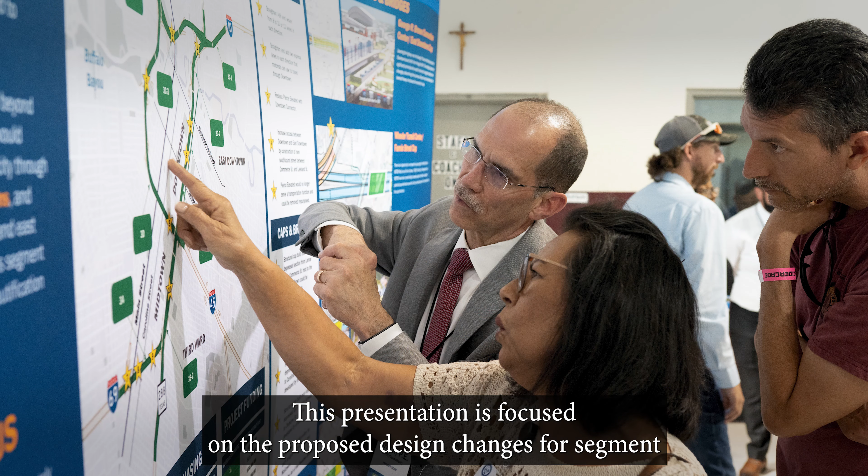This presentation is focused on the proposed design changes for Segment 3A. NHHIP Segment 3A includes modifications from the designs presented in the final environmental impact statement and record of decision. Therefore, the public has an opportunity to provide feedback on the changes presented during this public meeting.

TxDOT is required to assess the potential impacts of the proposed changes in accordance with federal standards. These standards are a provision of the National Environmental Policy Act, known as NEPA. The NEPA process provides analysis of the potential impacts to the natural and man-made environment and informs decision-makers on how to proceed with the proposed project.

On December 9, 2019, TxDOT received a signed Memorandum of Understanding from the Federal Highway Administration that permits TxDOT to assume responsibility for review and approval of certain assigned NEPA projects.

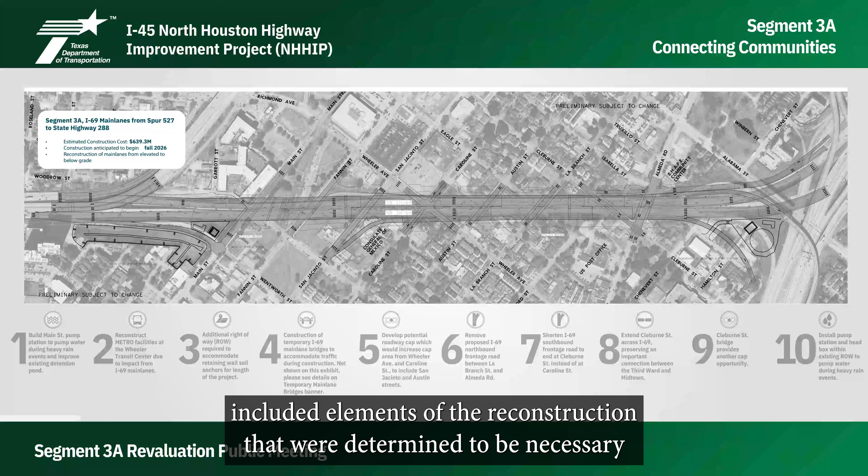The Segment 3A reevaluation is a function of changes to project design developed subsequent to issuance of the final environmental impact statement and record of decision. The changes include elements of the reconstruction determined to be necessary as part of the detailed design process that continues following the ROD, or elements determined to be important to the project as a result of consultation with local government agencies and community organizations.

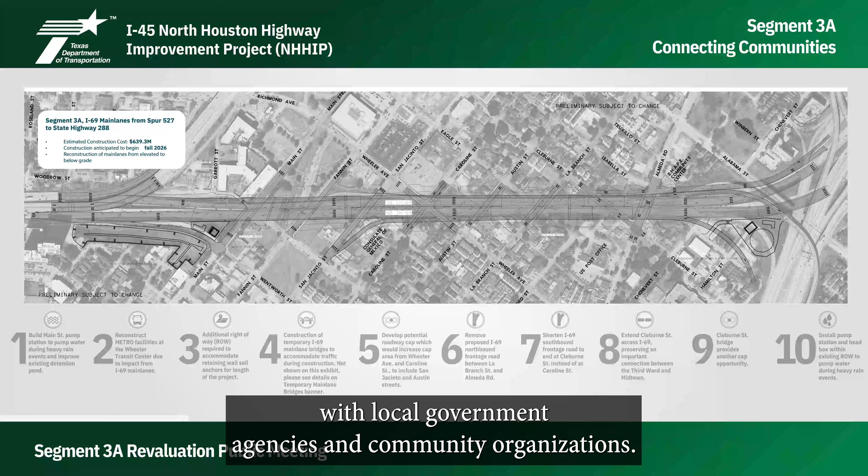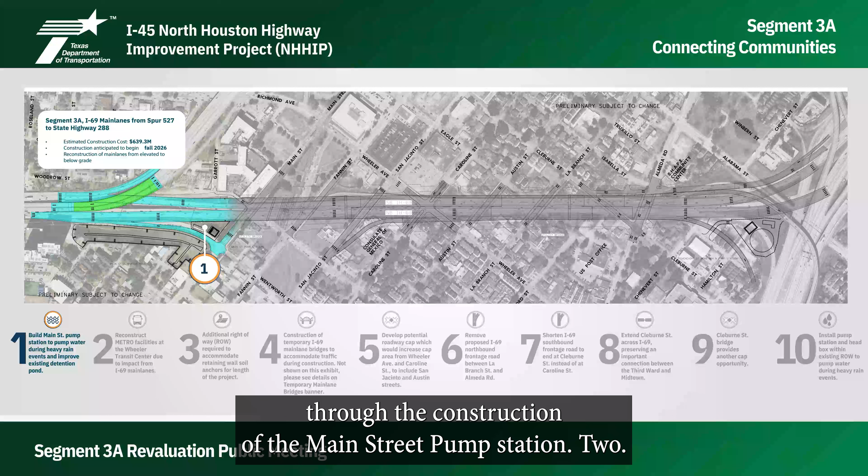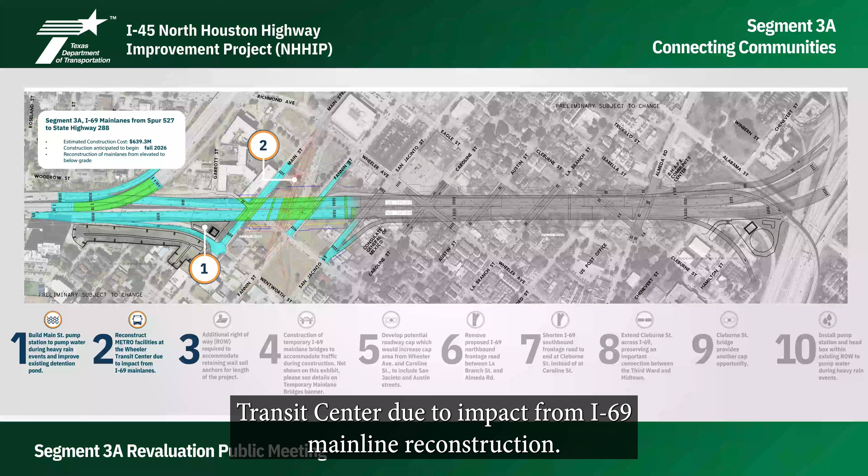10 elements of redesign are the focus of this reevaluation. They include: 1. Improving drainage through construction of the Main Street pump station. 2. Reconstruction of a cap to support Metro facilities at the Wheeler Transit Center due to impact from I-69 main lane reconstruction. 3. Additional right-of-way required to accommodate retaining wall soil anchors for the length of the project. 4. Construction of temporary I-69 main lane bridges to support traffic flow while construction takes place.

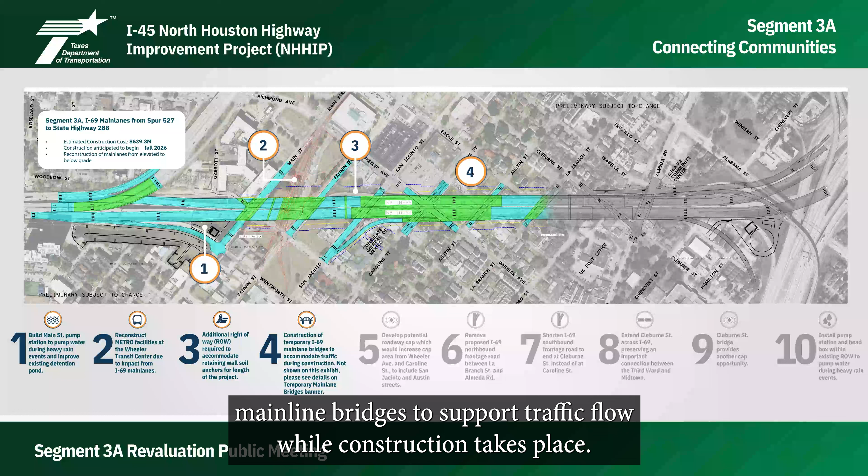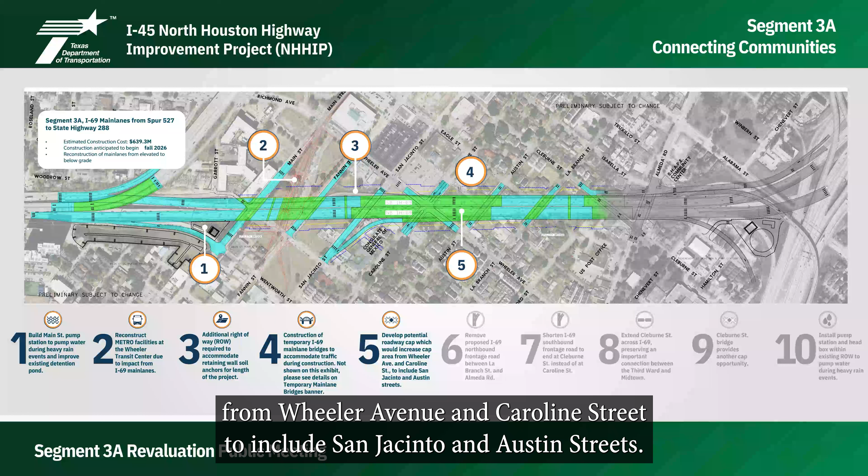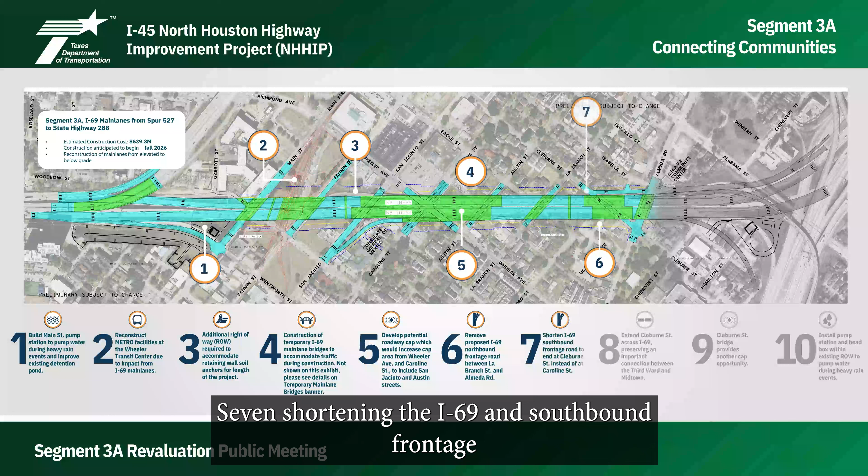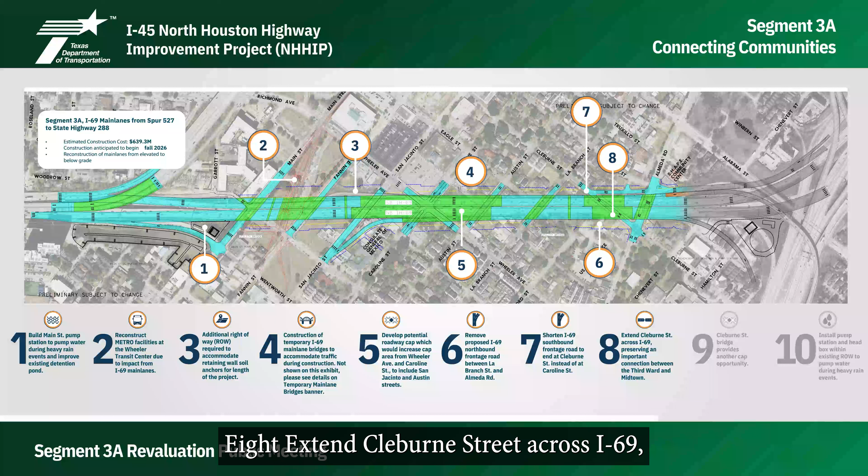5. Developing a potential roadway cap that would increase cap areas from Wheeler Avenue and Caroline Street to include San Jacinto and Austin Streets. 6. Removing the proposed I-69 northbound frontage road between La Branch and Almeda Road. 7. Shortening the I-69 southbound frontage road to end at Cleburne Street instead of Caroline Street. 8. Extending Cleburne Street across I-69, preserving an important connection between the 3rd Ward and Midtown.

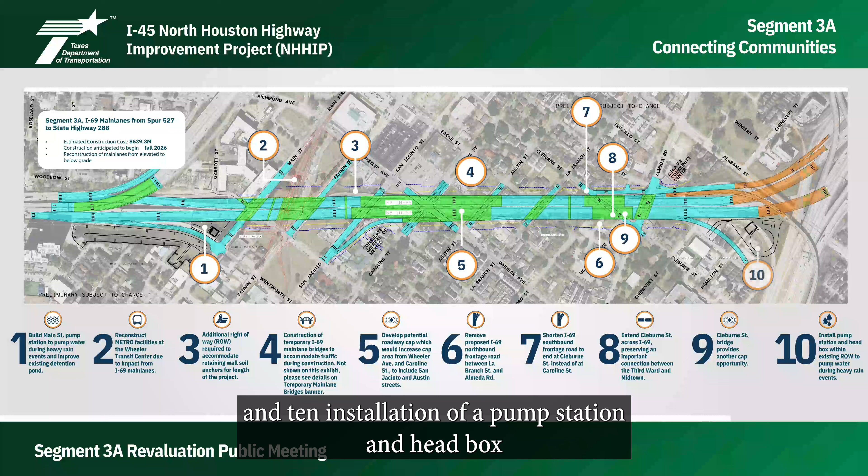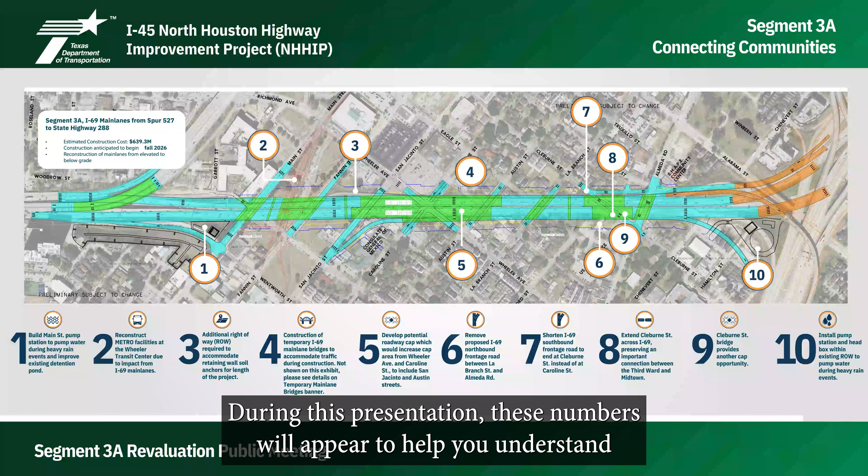9. Considering additional cap opportunities related to the Cleburne cap. And 10. Installation of a pump station and headbox within existing right-of-way to pump water during heavy rain events. During this presentation, these numbers will appear to help you understand the location of these elements as shown on the presentation map. Related elements will be aggregated in this presentation to aid the explanation.

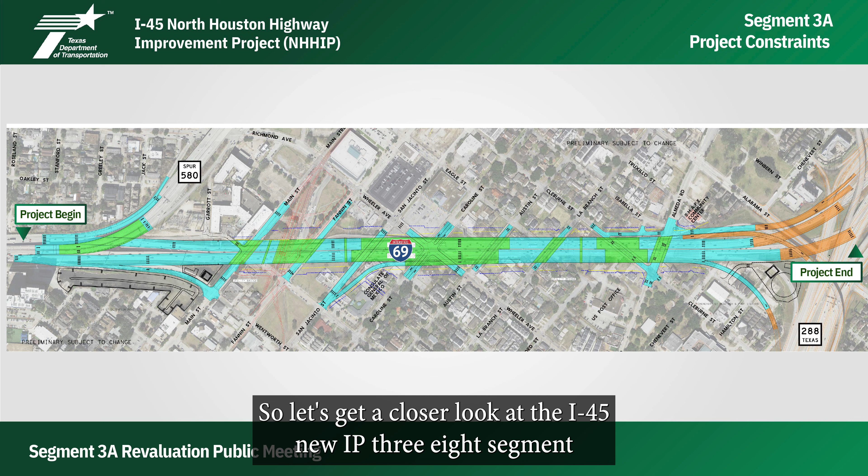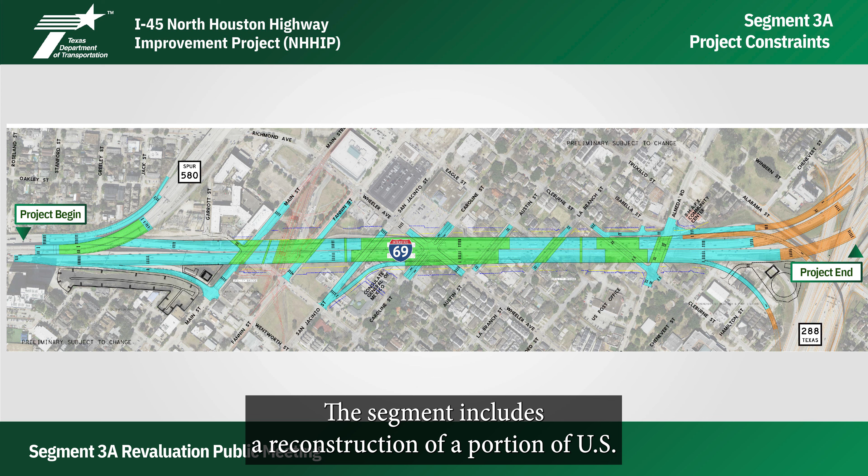So let's get a closer look at the I-45 NHHIP 3A segment and the elements considered for redesign. The segment includes a reconstruction of a portion of U.S. Interstate 69. The limits of the Segment 3A construction begin just west of Spur 527 and end at the intersection of I-69 west of Highway 288.

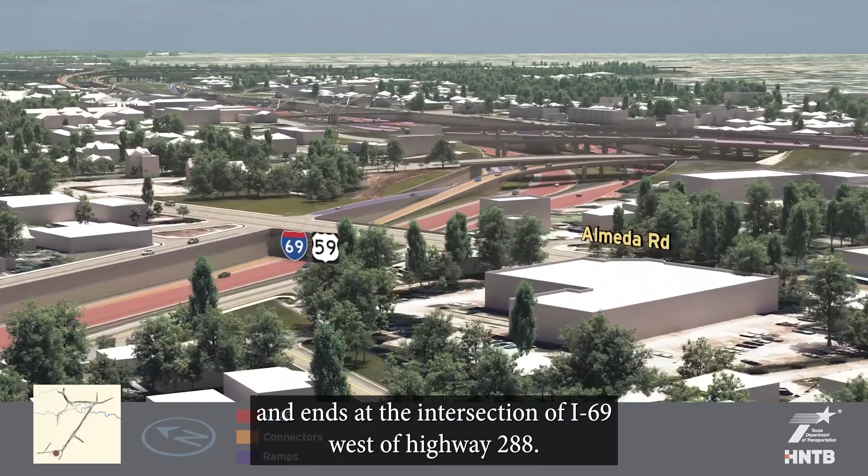This part of the project is slated to begin in the fall of 2026, with completion estimated to take 6 years. The estimated cost for this project part is $639 million.

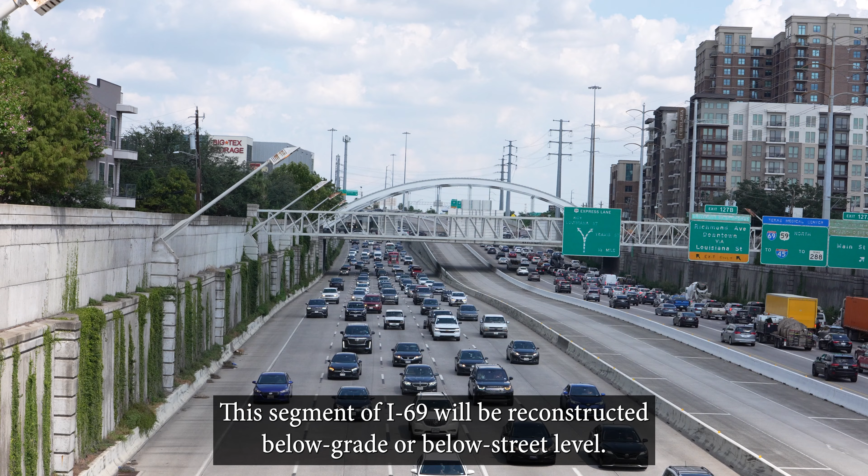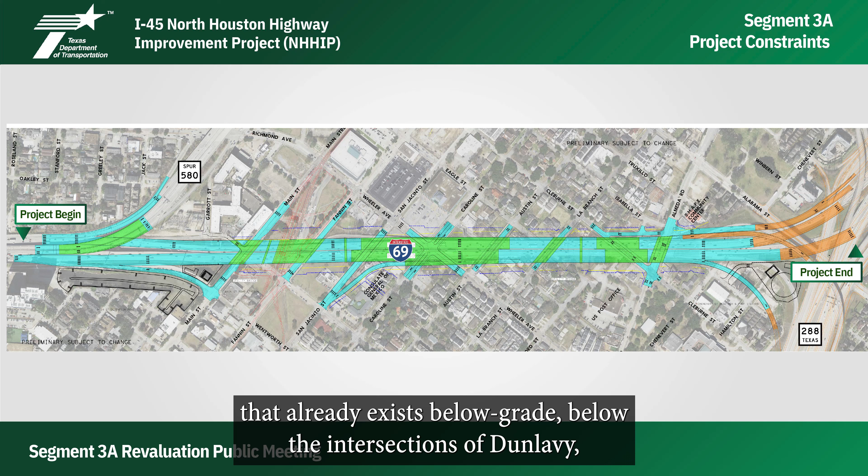As part of the NHHIP project, this segment of I-69 will be reconstructed below grade, or below street level. This design will allow for improved connectivity for some of Houston's most used surface streets. It will create continuity with an existing part of I-69 that already exists below grade, below the intersections of Dunlavy, Mandell, and Montrose.

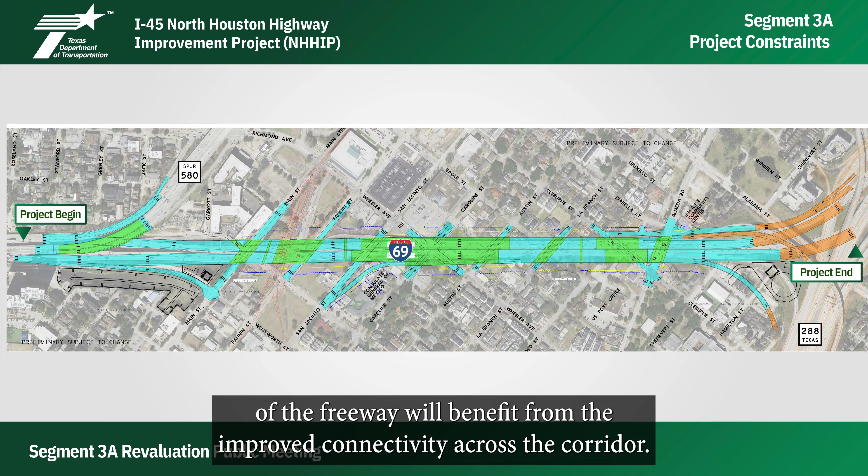Communities north and south of this portion of the freeway will benefit from the improved connectivity across the corridor. Surface roads including Main Street, Fannin, San Jacinto, Wheeler, Caroline, Austin, LaBranch, Cleburne, Almeda, and Alabama will connect over I-69.

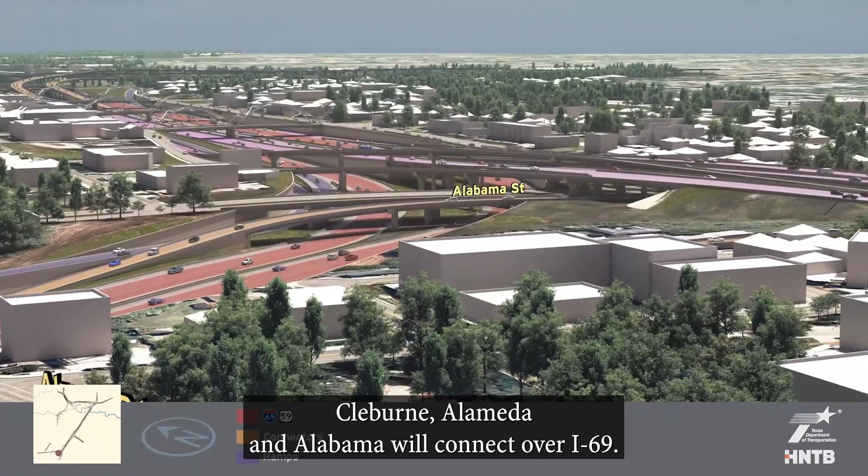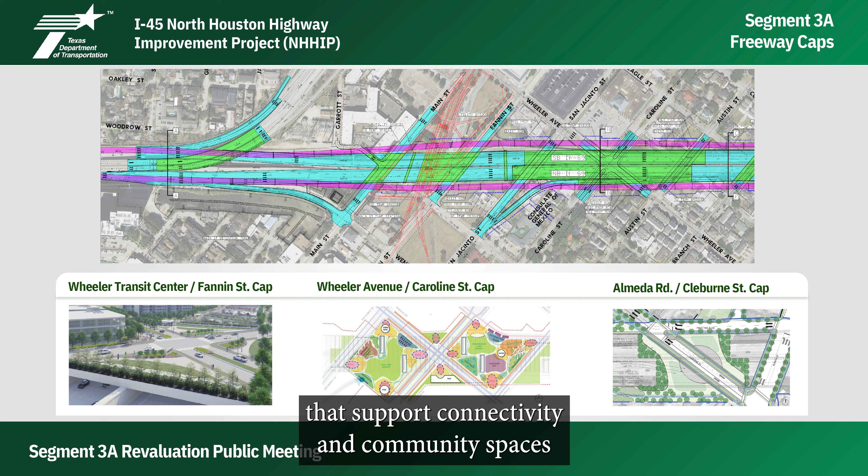The new infrastructure will also offer the opportunity to develop caps over the freeway, which are infrastructure elements that support connectivity and community spaces with an array of potential uses including bike and pedestrian paths, art installations, park spaces, and other applications. TxDOT calls the process for determining what will exist on these spaces the art of the possible.

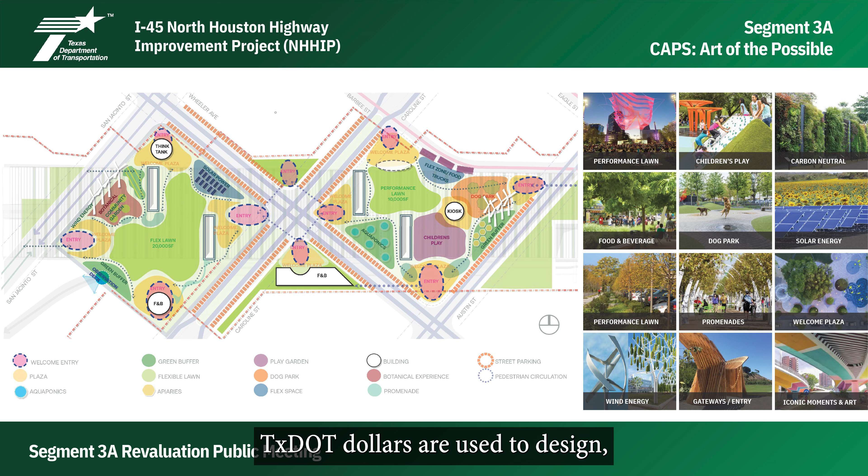Remember, third-party funding is critical for the lighting and shade elements and other features and amenities placed on the caps. TxDOT dollars are used to design, build, and ensure the integrity of freeway construction.

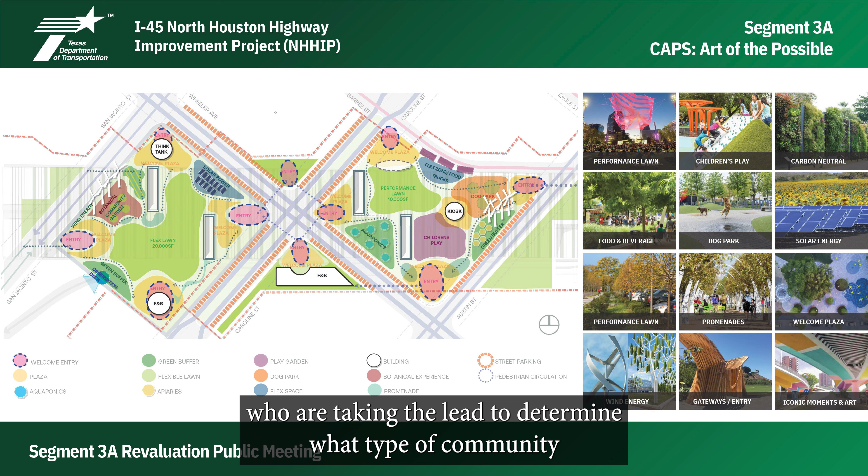TxDOT collaborates with other agencies and local development organizations who are taking the lead to determine what type of community amenities might be placed atop the caps. In this case, TxDOT is working with the City of Houston and the Southeast Management District.

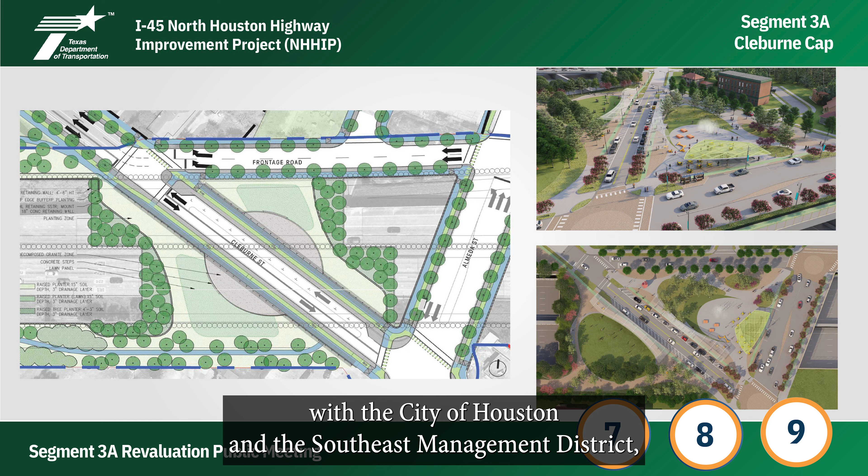And the city has requested specific changes from the original design. For example, City of Houston officials requested that Cleburne Street be extended and connected across I-69.

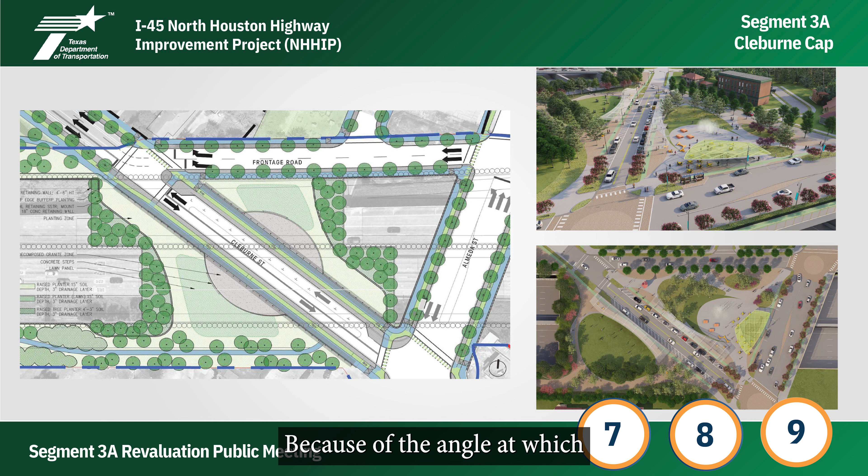Because of the angle at which Cleburne crosses I-69, TxDOT is designing a 300-foot wide cap, roughly the length of a football field, to add connectivity not just for vehicles but for bikes and pedestrians.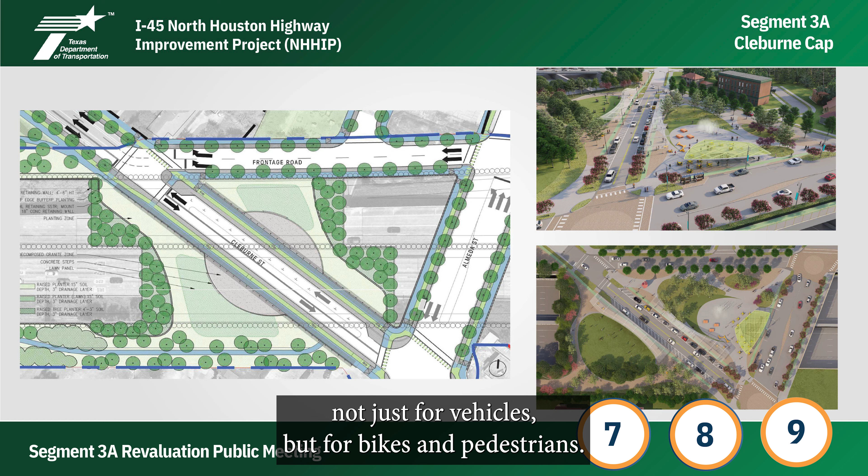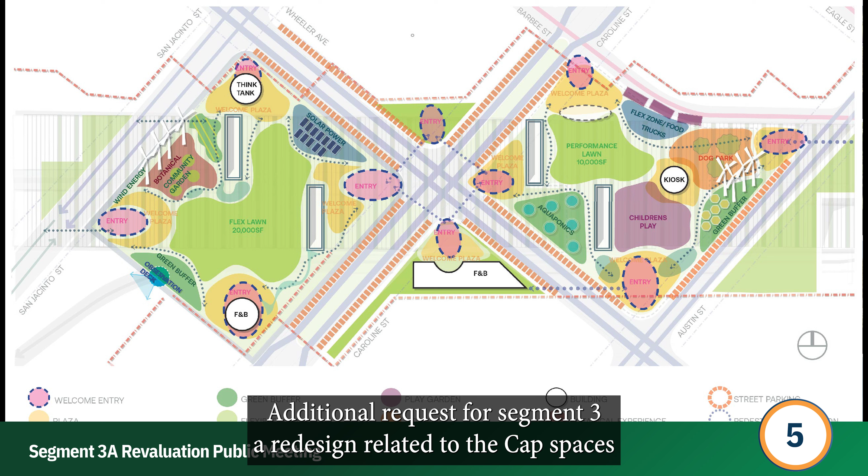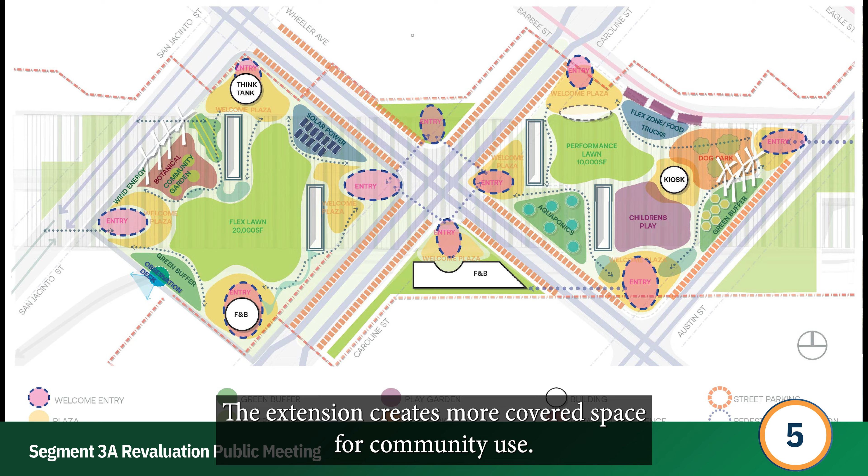Additional opportunities for an extension of the Cleburne cap are under consideration. Additional requests for Segment 3A redesign related to the cap spaces includes the extension of the cap connecting Wheeler Avenue and Caroline Street from San Jacinto Street all the way to Austin Street. The extension creates more covered space for community use.

Another cap, known as the LRT Fannin in Midtown, could support Metro's commuter station and rail improvements.

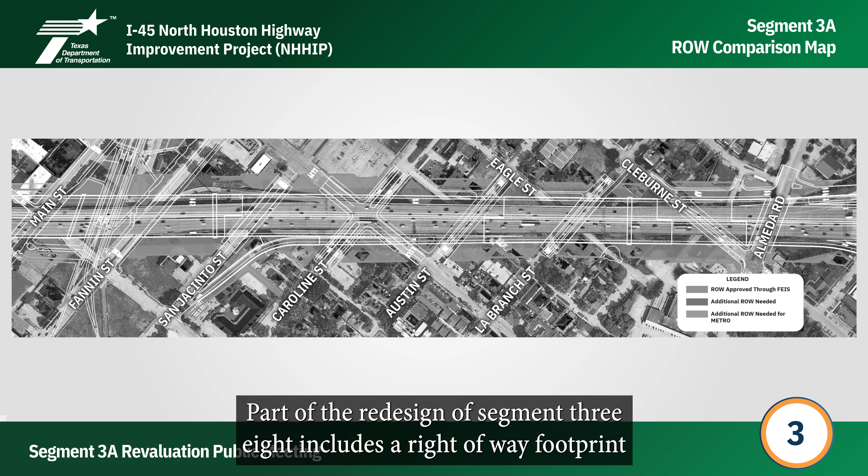Part of the redesign of Segment 3A includes a right-of-way footprint larger than previously proposed in the Final Environmental Impact Statement. The redesign proposes the acquisition of an additional 3.3 acres of right-of-way.

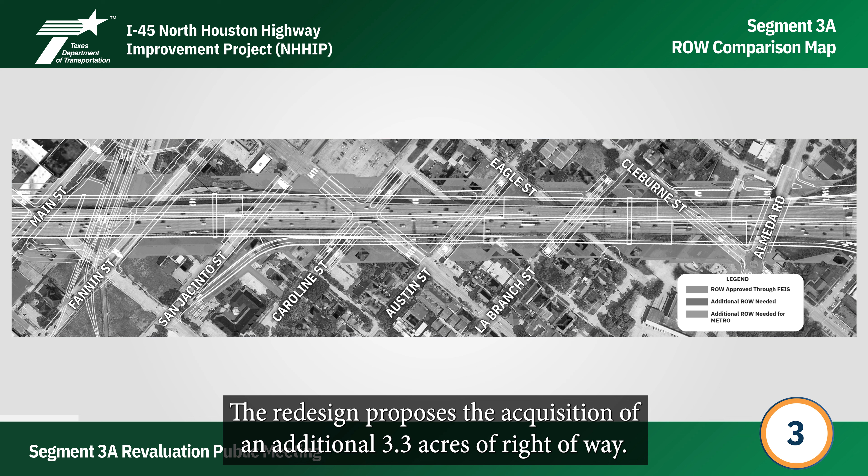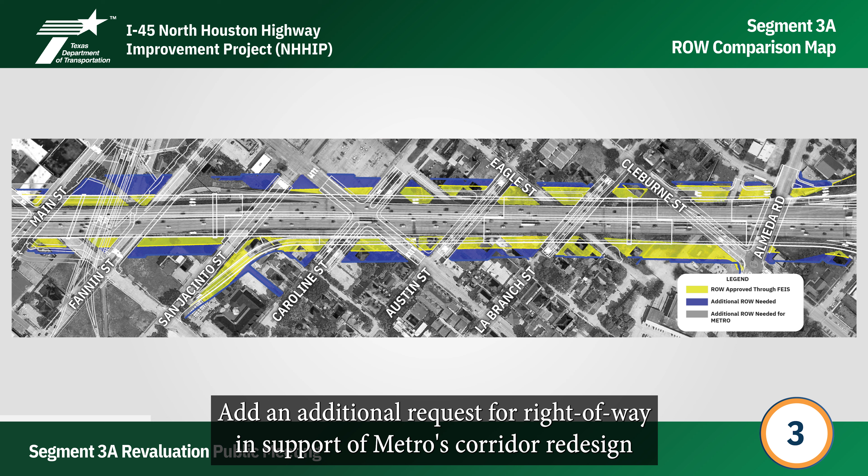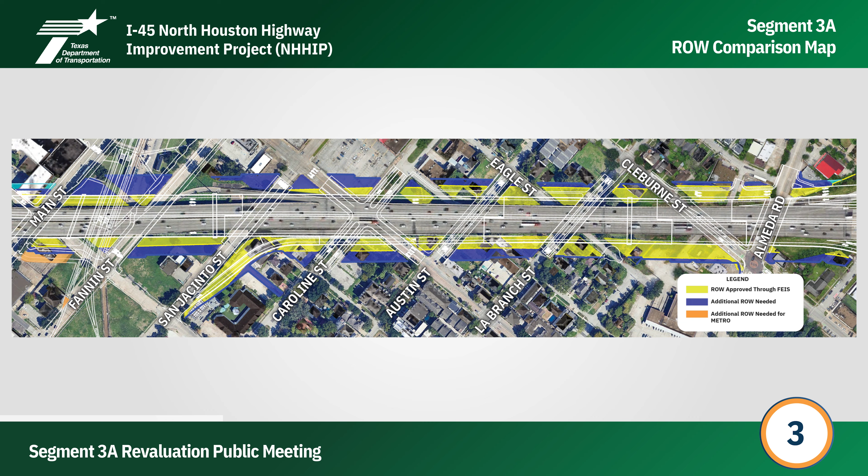This map shows the previous request for right-of-way acquisition in yellow. The additional request for right-of-way is in blue, and an additional request for right-of-way in support of Metro's corridor redesign in orange. Expansion of the right-of-way is necessary to accommodate the space for proper installation of support infrastructure, most notably the retaining walls and the wall anchor system that will protect the below-grade portions of the freeway.

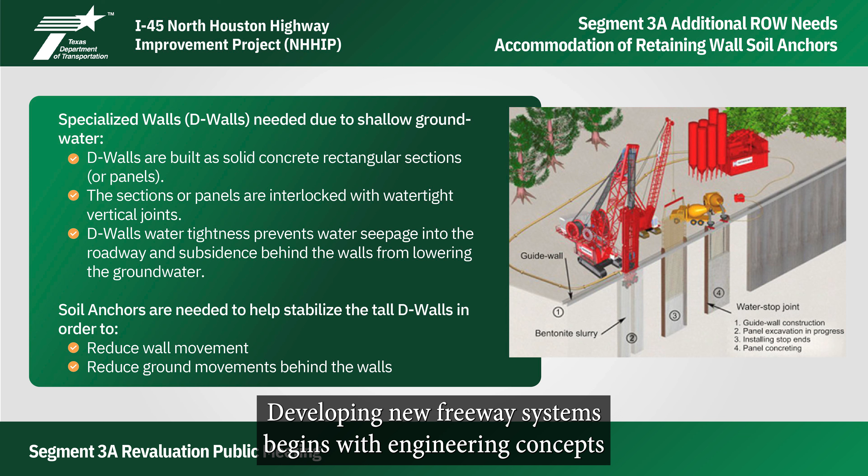Developing new freeway systems begins with engineering concepts designed to maintain system integrity. One such feature are the specialized retaining walls that will be constructed to support the below-grade portions of I-69.

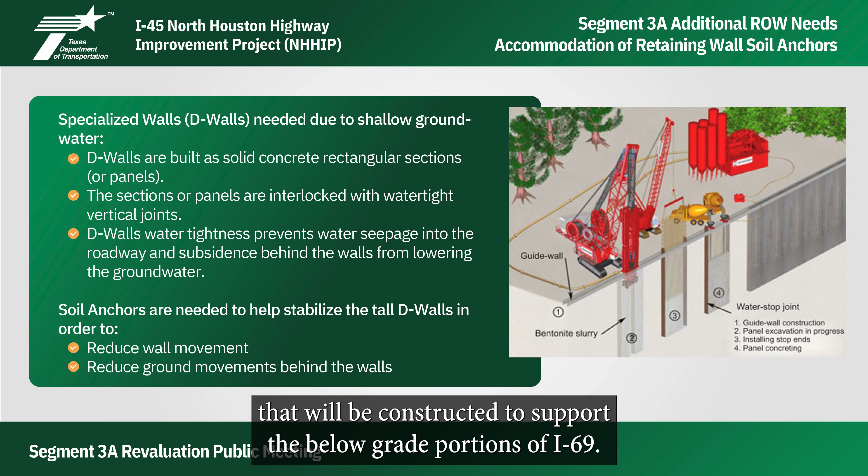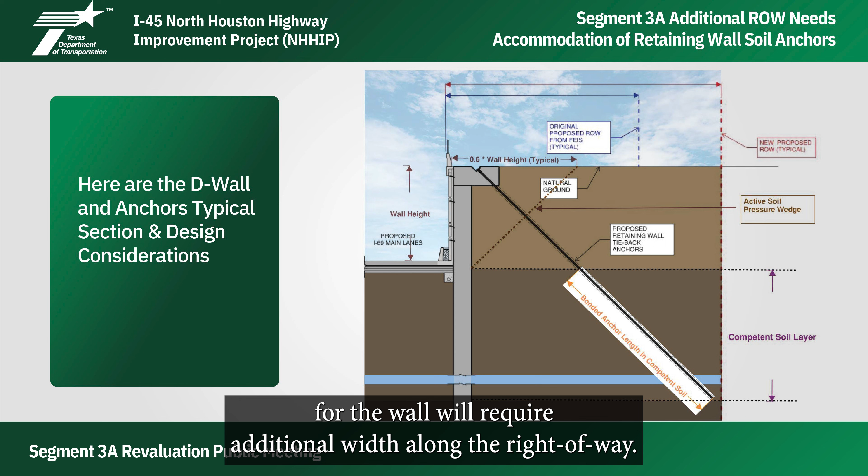Retaining wall anchors will be installed into soil behind the retaining wall and will attach to the wall to provide additional anchoring to prevent or minimize wall movement. Detailed engineering analysis has determined the proper support for the walls will require additional width along the right-of-way.

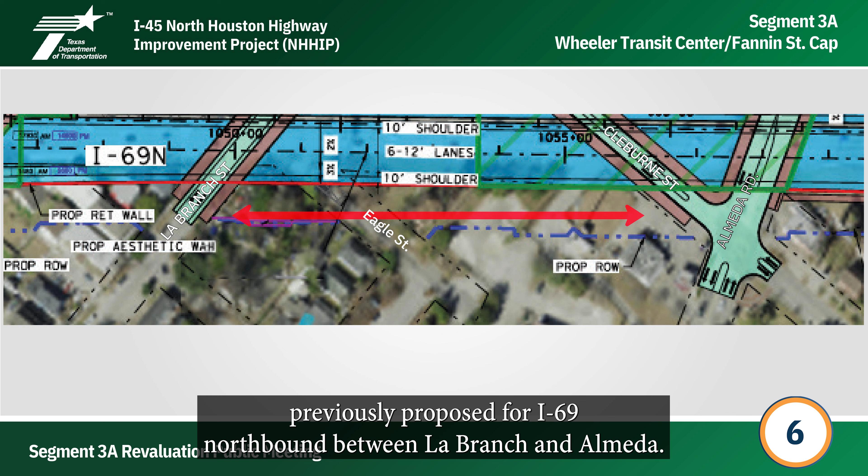The extension of Cleburne Street would result in the removal of frontage road previously proposed for I-69 northbound between La Branch and Almeda. Eagle Street, located near this length of right-of-way, would be converted into a cul-de-sac.

As mentioned, construction of this segment of highway is expected to take 6 years to complete. To better accommodate north and south traffic during reconstruction, temporary northbound and southbound 3-lane bridges will be constructed to support traffic flow until the more permanent construction is completed.

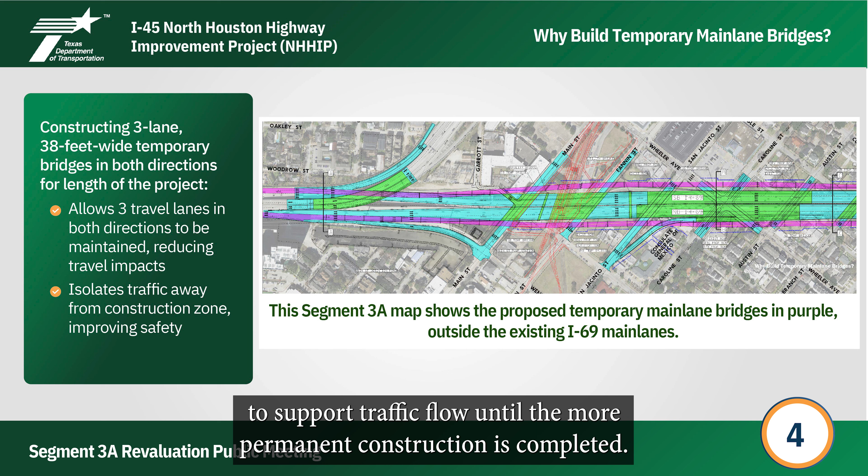The proposed temporary lanes can be seen here in purple. The bridges will be 38 feet wide, supporting 3 11-foot lanes.

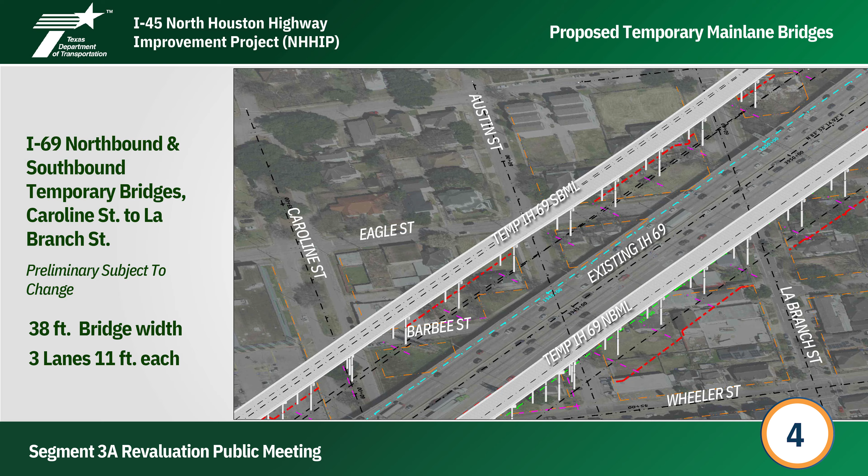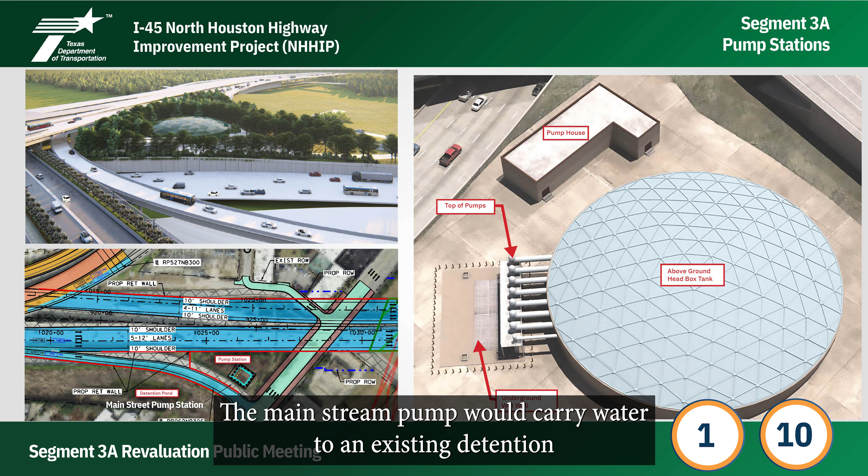To support stormwater resiliency, TxDOT is proposing 2 pump stations to support removal of stormwater from roadways. The Main Street pump would carry water to an existing detention pond that currently exists near Main Street.

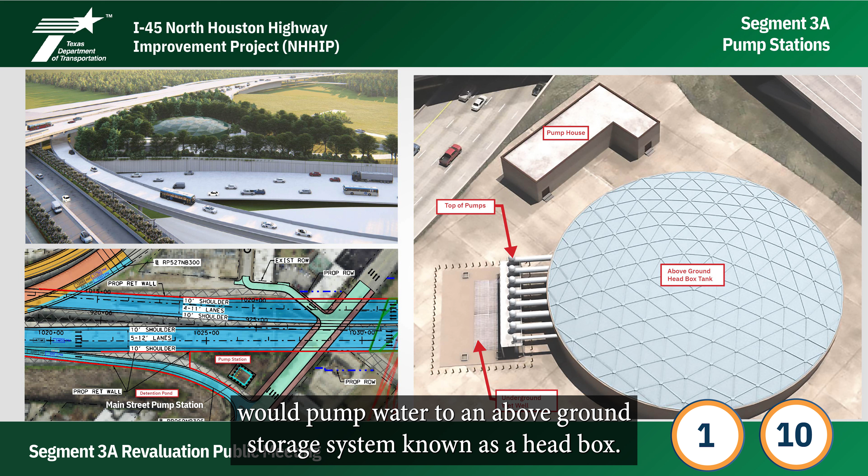The pump located near the intersection with Highway 288 would pump water to an above-ground storage system known as a headbox. The water would be retained here and emptied to Brays Bayou as the bayou is able to handle the stormwater runoff.

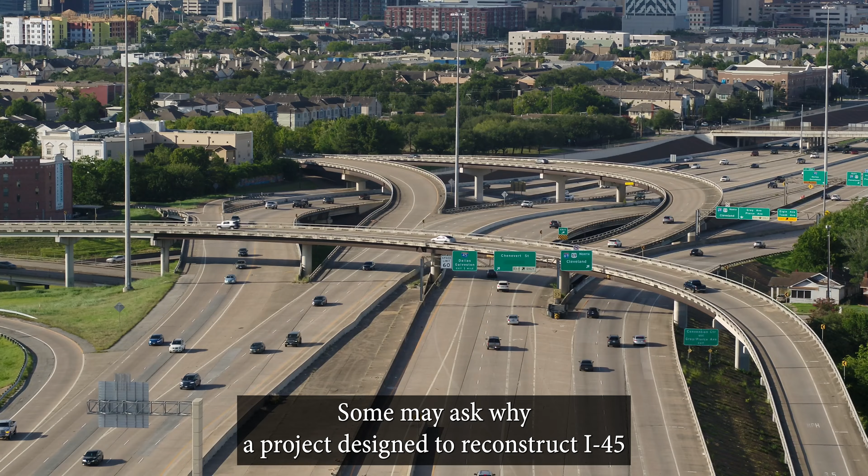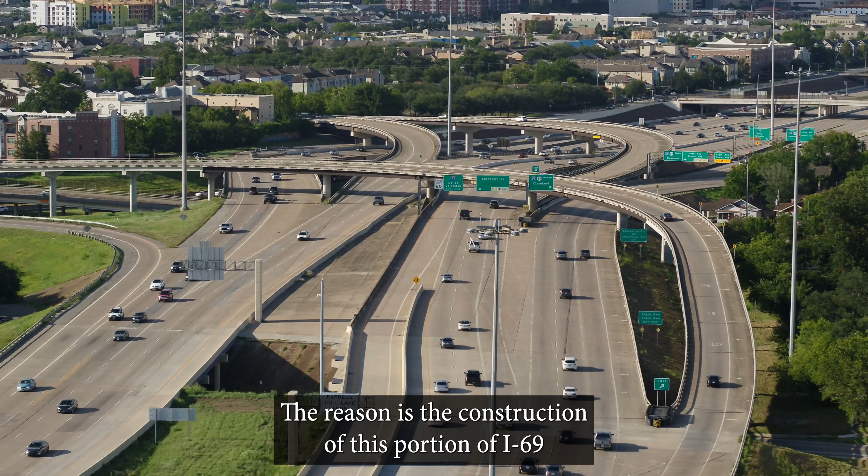Some may ask why a project designed to reconstruct I-45 has a significant redesign of Highway 69 contained in it. The reason is the construction of this portion of I-69 is considered critical for improving the flow of traffic along the parallel sections of Highway 288 and I-69 as they flow into I-45.